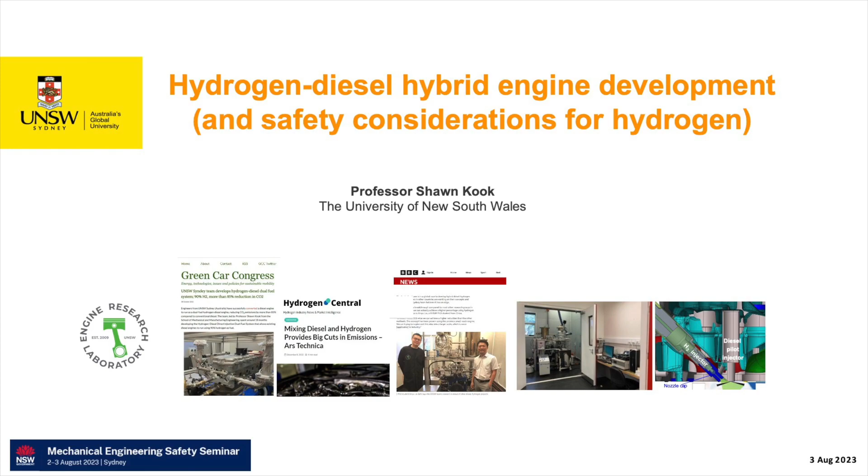So I've been showing up in many news articles, including the ABC News live show, who called me up like 2 hours before the live show, early in the morning. BBC News had a big hit too, and we started to get interest from pretty much everyone, investors, engine operators, engine developers, as well as the general public.

So I'd like to share the news, and to make my talk even more relevant, I'm even going to talk about some safety concerns around utilizing hydrogen in your workplace.

So hydrogen is something big now. It's a buzzword. It was big in the early 2000s, if you remember, but then it was quiet for a while. But now it's kicking up again as a valuable commodity, particularly for Australia.

Australia has a great vision to utilize abundant solar and wind resources to convert some of the water we can provide, seawater, into hydrogen, and actually export it to countries where energy demand is much higher than in Australia, countries like China, Korea, and Japan. So we have a clear vision and plan for it.

And the investment being made into hydrogen production is just massive. Just looking at the numbers, $260 billion US dollars is projected by 2030, and the investment is increasing. As I keep checking the investment portfolio, the number just keeps going higher and higher, led by the US as well as Germany, but the Australian government is hopping on too.

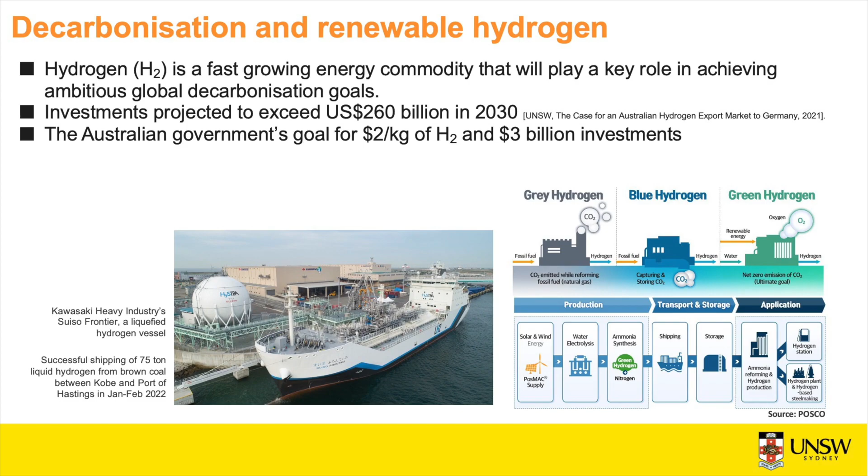If you're not really familiar with hydrogen as a new commodity, you'll be surprised to hear about the colors of hydrogen. Hydrogen has no color, but people try to flag a color to it. So our typical hydrogen is what's called gray hydrogen, which you get as a byproduct of fossil fuel processing. Then if you have some carbon capture facility in your hydrogen production facility, we start to call that blue hydrogen, rooting towards green hydrogen.

When you say green, that means the electricity is generated from a non-fossil based power source, energy source, and you use that to do water electrolysis to get hydrogen out of water. So that's green hydrogen. And there are a lot of feedstocks that I'll mention later on.

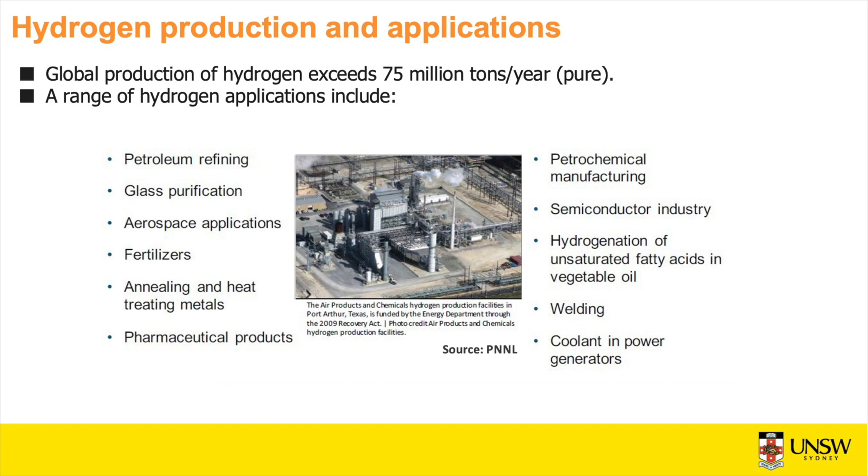But the use of hydrogen is nothing new. We don't have it in our households, but it's definitely been used in many processes: petroleum refining, glass purification, aerospace applications, and in agriculture for making fertilizer. All these processes require hydrogen as a needed element. So it has been around for a long time, and there's a very well-established safety standard around it too.

But then, where do we get hydrogen is becoming a big question. Traditionally, like I mentioned earlier, it's been obtained as a byproduct of fossil fuel processing. Then there has been gradual interest in producing hydrogen from other sources. One example is a coal mine, coal power generation plant, that would be willing to convert some of their coal into hydrogen as a new commodity.

Nuclear power, where electricity generation is continuous, that electricity can be used to generate hydrogen. Natural gas can be reformed too, because if you remember, natural gas is CH4, so there are a lot of hydrogen molecules in it, and we can extract hydrogen out of that CH4.

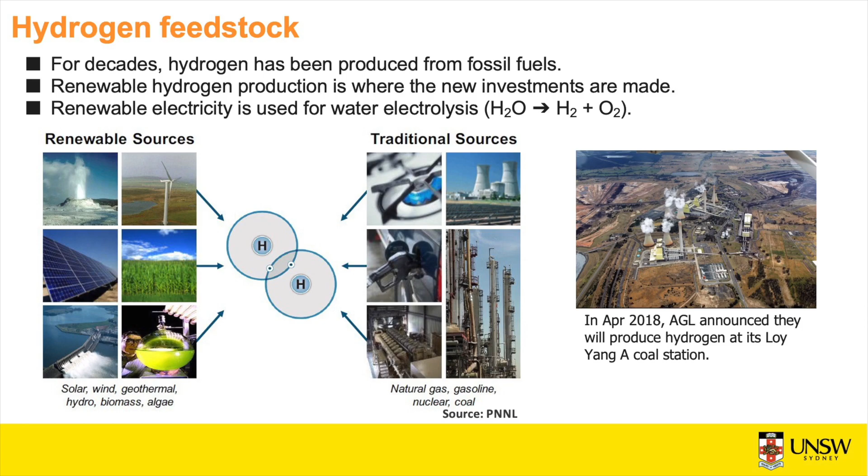On top of that, we have some renewable sources. As I mentioned earlier, water electrolysis is one process to get hydrogen. That energy can be supplied from renewable electricity, or from bio feedstock, where there is low carbon, a renewable, carbon neutral feedstock provided to generate electricity, which is then used to generate hydrogen. We call that renewable hydrogen. So there's a mix of feedstocks supplying hydrogen from greener sources as well as traditional sources, increasing hydrogen production overall, globally.

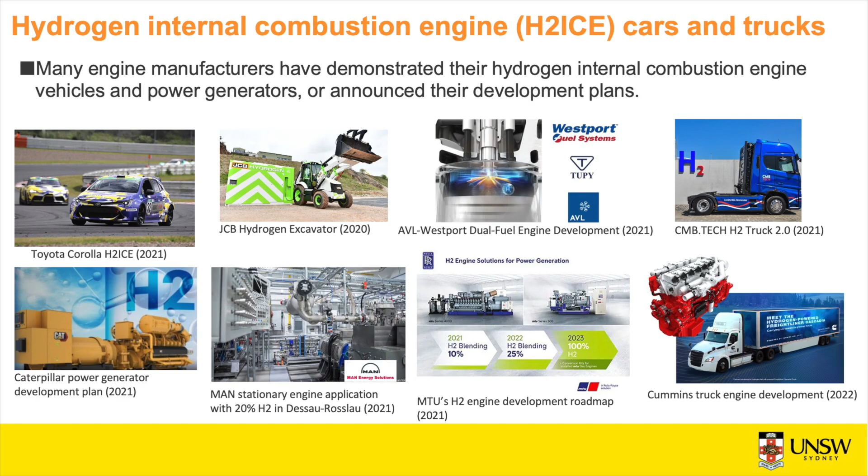Some exciting thing. I'm a mechanical engineer. I started my mechanical engineering study and continued my career because of this. There are some exciting things about looking at cars running, generating power that's based on combustion.

We burn petroleum or diesel in traditional cars, but now engine manufacturers are developing new kinds of engines and vehicles utilizing those new kinds of engines, primarily for hydrogen as a carbon neutral fuel. So when hydrogen is supplied as a green energy source, there's a good use of hydrogen in combustion engines. That's the theme here.

Toyota is actually leading. This is the largest automotive company in the world at the moment, surpassed Volkswagen a couple of years ago and is actually widening the gap thanks to their great success in hybrid sales and the profit made from hybrid sales. They are willing to put a hydrogen car into the market.

So the first thing they did was convert their existing Toyota Corolla into a pure hydrogen engine, put it onto one of the Japanese racetracks and demonstrated a full race with this new hydrogen car with great performance.

And there is a lot of development going on from other areas too, such as excavators, heavy-duty truck manufacturers like Westport working together with AVL and Tupy, and also some retrofitting and conversion tech implemented by a European company called CMB Tech. Then heavy-duty engine manufacturers are joining the party too.

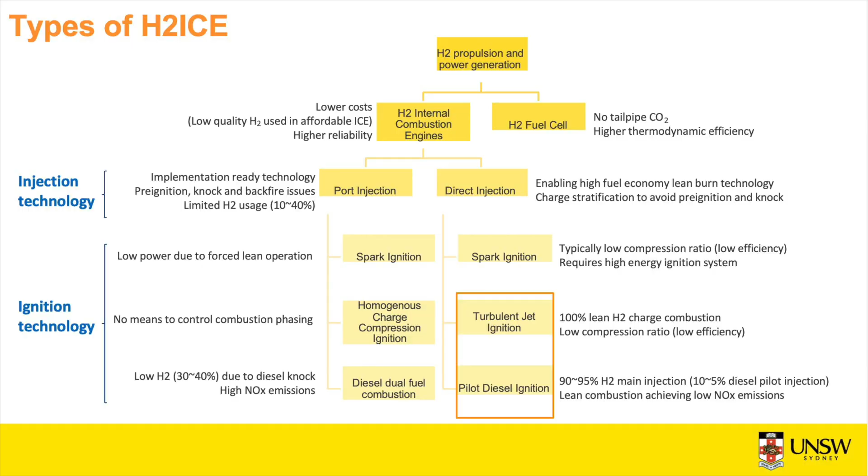Then the limitation there is that a spark ignition engine has a lower compression ratio. So when the piston cylinder is compressing, the volume change ratio is lower. That translates into lower thermal efficiency, so your engine is naturally lower efficiency. That's why you are using a diesel engine in your workplace, higher torque and higher efficiency operation. So fundamentally, the efficiency is limited.

Then the question is raised: is there any better way of using hydrogen in your existing engine, or a new kind of engine that can give you better efficiency? So there are a lot of questions raised about it and development going on.

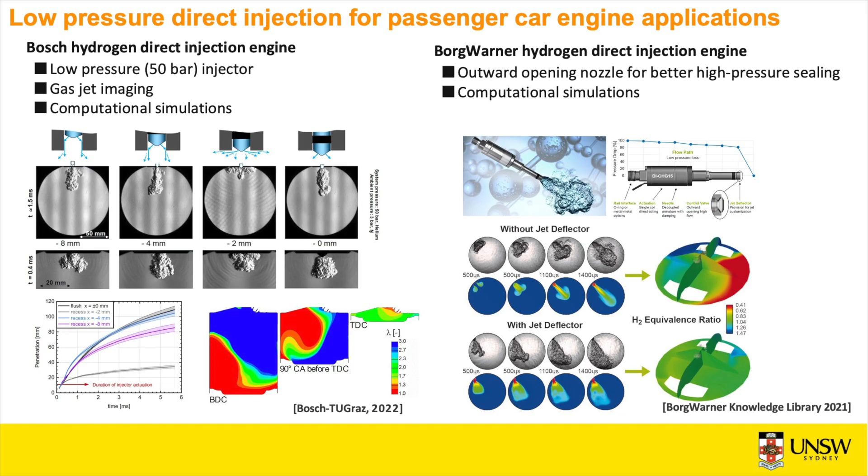And on the passenger car side, part manufacturers like Bosch or BorgWarner are working on low pressure direct injection systems, meaning that hydrogen gas is injected into the cylinder at a pressure that's higher than typical port injection engine pressure, but much lower than diesel operation.

Typical diesel engines that you're using are now hitting 3,000 bar of injection pressure. By the time the fuel is going into the cylinder, it's hitting about 3,000 bar, so 3,000 times atmospheric pressure.

The first generation hydrogen injectors made by Bosch or BorgWarner are going at about 50 bar maximum, so 50 bar over pressure. That can give you nice distribution of hydrogen gas jet. And there are some optical diagnostic techniques that can visualize this invisible hydrogen, particularly the Schlieren imaging technique utilized by Bosch. That's showing how hydrogen distribution could be different depending on the mounting position of a fuel injector. It was shown in this example.

BorgWarner is going deeper into that development. They now have an injector that doesn't have any holes, but has a pintle. So it has a slit of opening area where the hydrogen sealing can be much better than the typical hole type injector. And they're supplying the information about that through their computational simulation as well as gas jet visualization.

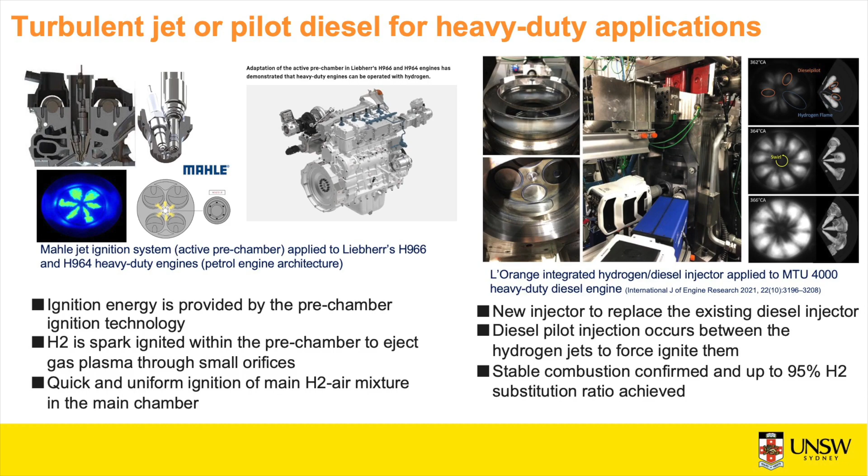On heavier duty applications, it doesn't actually go into the scale of earth moving equipment that you guys are using at the moment, but still it's heavy duty applications for trucks and some marine applications as well, small marine engines. The most advanced technologies for hydrogen utilization in that space is that you either do hydrogen pre-chamber ignition, meaning that hydrogen is supplied as a main fuel, but then you have a little chamber that includes a spark plug in it.

So you make a baby flame first using hydrogen through that spark ignition, and that reacting jet, the flame, is coming out directly into the cylinder and causing that two-stage ignition, pre-chamber type ignition system. It has great controllability, so robust ignition is possible using that setting. And Liebherr, that Swiss company, is commercializing that technology at the moment.

In Germany, L'Orange, it sounds French, but it's actually a Stuttgart-based German company. L'Orange has developed the injection system that can do both diesel and hydrogen injection in a single injector, an integrated system. And they've demonstrated great flame development and combustion of this hydrogen due to the sip of diesel fuel going in. It's like a diesel pilot fuel is generating a little flame, and it's causing the reaction of the main fuel, the hydrogen jet. So it's a hydrogen jet ignition and reaction that is shown as an example.

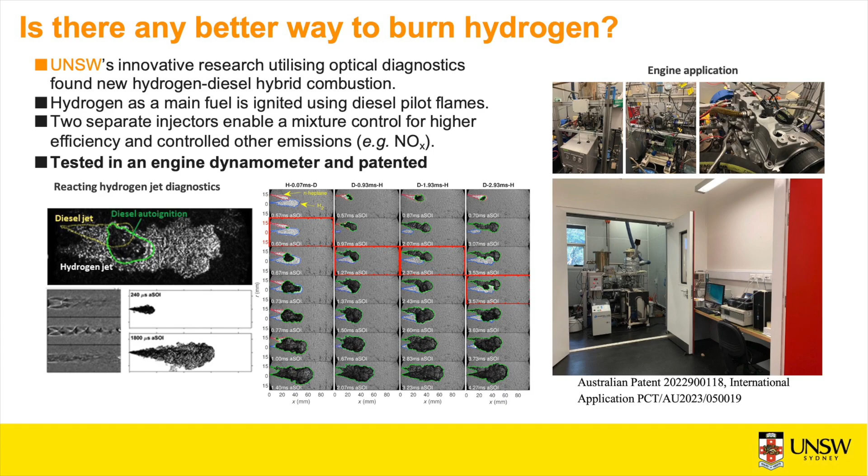Okay, so you've heard about Germans working on it, Japanese working on it, American companies working on it, but how about Australia? So we've looked into many options to burn hydrogen better, and what's the missing element there, and we found this. What if we have two separate injectors? So you have the existing diesel injector untouched in your engine. Typically, it's centrally mounted right into the cylinder, injecting multiple jets, creating a symmetric form of a diesel jet. On top of that, we can add a hydrogen injector so that we can have full control of that hydrogen jet.

And that's been studied in the lab facility. We are specialists in visualizing things and taking high-speed images and laser-based images as well. So we've looked into how the hydrogen jet, even before it burns, is generated, and saw some interesting things like barrel shock generation from the hydrogen jet injected at high pressure, like 200 bar.

And then we also looked into how the burning process itself is happening, and realized that the yellow area shown on the left side, the diesel jet, is actually causing the initial reaction, and the green area where the hydrogen reaction starts is catching fire around that jet in a nicely controlled manner. And that high-speed imaging gives you an idea about how the yellow-colored diesel jet is trailing the hydrogen jet green area and causing the reaction zone in a well-controlled manner. So we enjoyed great controllability of the hydrogen reaction through the control of diesel injection.

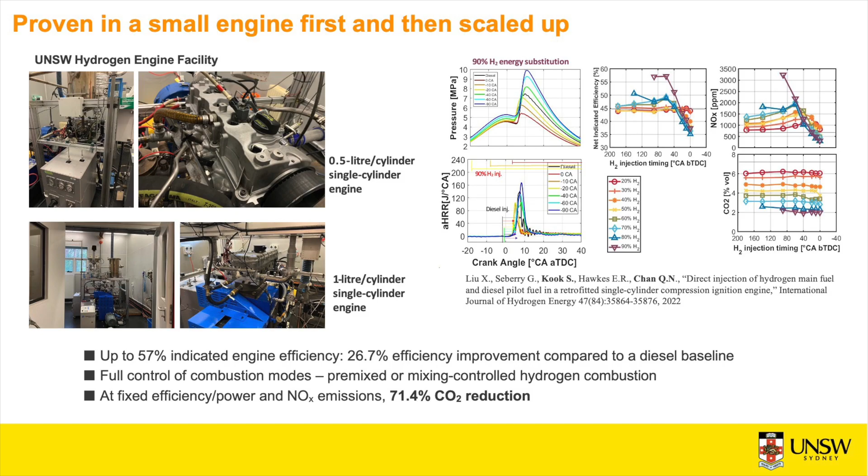And the performance charts shown here are actually confirming the excellent performance of this hydrogen diesel hybrid engine. With the hydrogen jet ignited by diesel flame approach, we see the efficiency hitting an indicated efficiency of 57% maximum. It's actually better even than the fuel cell system, which hits about 53% indicated efficiency. Diesel operation is at about 50% efficiency, so we're actually winning even against the baseline diesel operation.

Then we also looked at how much CO2 reduction we can achieve out of this operation. By supplying about 90% of the energy from hydrogen, we could achieve over 80% CO2 reduction immediately. That was a big factor for us: here is an existing diesel engine operating just like a diesel engine with only additional hydrogen, and we can achieve over 80% CO2 reduction immediately by just making a small conversion to that engine.

If you're really familiar with engine technology, the first question you will raise would be: how about NOx? The air comprises nitrogen and oxygen. And unfortunately, wherever there's a high temperature above 1800 Kelvin, the nitrogen and oxygen break down and then meet together, form NO, nitrogen oxide, then settle down as NO2. When you see much NO2 in the atmosphere, it's forming smog, it's becoming a source of fine particles, and it's also a greenhouse gas emission. So it's strictly regulated. Anywhere there's combustion, even with a non-carbon-based hydrogen fuel, it's unavoidable. So the question is raised: great combustion engine, how about NOx?

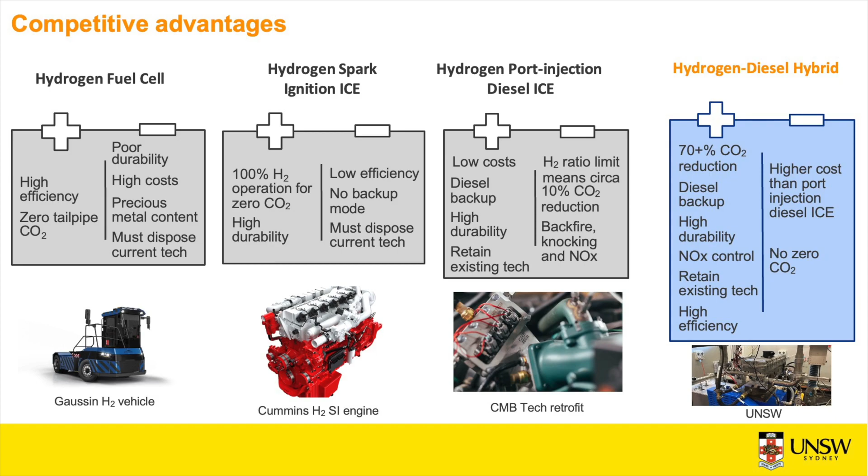Then how about compared to other technologies? It sounds exciting, the university did a great job, but there are many commercialized technologies around utilizing hydrogen. The first one you will hear of would be fuel cell vehicles. There are many energy projects going on to implement fuel cell vehicles on the road or in a controlled environment. Absolutely fantastic, zero CO2 emissions. Hydrogen utilization is amazing, but the demand for hydrogen purity is too high, which means the hydrogen production cost is too high, and the fuel cell production cost is too high. So it will take some decades until fuel cell systems can become practical and affordable at the same time.

The hydrogen spark ignition engine, as I briefly mentioned earlier for the Cummins engine, fundamentally runs at lower efficiency than the diesel architecture. How about then putting just hydrogen into the intake port? The simple implementation, you don't even need to touch the engine, just an intake manifold or port conversion with hydrogen in a diesel engine. That is limited to about 30% hydrogen utilization by energy, simply because you're putting hydrogen in too early. It's making too well-mixed a mixture, staying too long in the intake manifold and inside the cylinder, and losing all the efficiency.

Even if you seal it nicely, a higher hydrogen fraction in that nicely mixed condition, unfortunately, causes troublesome knocking. And this hydrogen knocking condition is an engine-damaging condition. One big knock is not just small knocking and pre-ignition leaving some marks on the cylinder head or piston top, but actually engine-damaging knocking that you can't really handle.

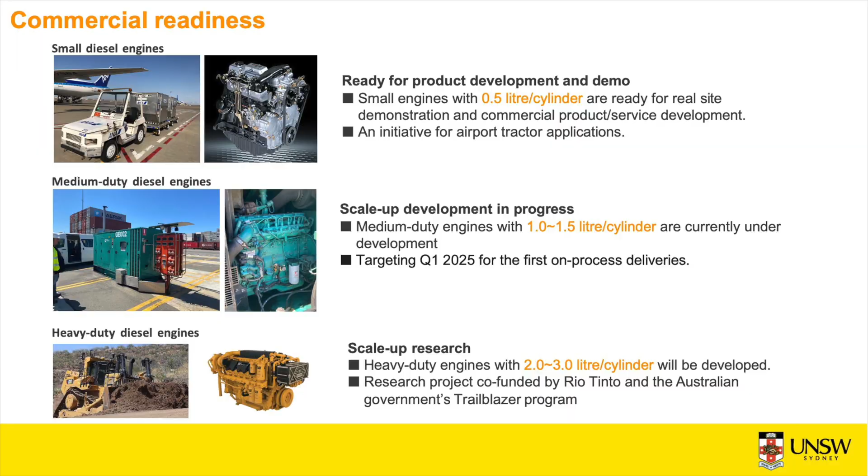That's the end of the talk actually for most academics, but we are living in a world where academia cannot just stay as academia, but has to reach out, do better socialization with the community, and make a real impact on the economy as well as society. So we are really encouraged to bring this into the real world.

Instead of waiting for the original engine manufacturers to commercialize this in 5 or 10 years' time, small startup companies based on innovative university culture can actually make a big difference. So we've moved ahead with that and came up with nice deals. There is a great initiative of implementing this new hydrogen diesel hybrid technology in the airport baggage tractor, very close to us here.

Another pilot and demo project that we're working on is based at the Sydney Port, where a diesel power genset, a power generator, can be converted into our hydrogen diesel operation to demonstrate its full capability of running in a real site, in a real environment, with the people who actually manage these diesel power generators. If they can be provided training, if this can be accommodated in a real site with no drama. That's what we are currently demonstrating.

And finally, thanks to Rio Tinto, who raised their hand to join the University Trailblazer program through the Department of Education, we've secured a significant amount of budget for the further development of this technology. We call this a major scale-up project, so that it can be relevant to Australian mining. We're looking at a large-scale Caterpillar dozer as a first application.

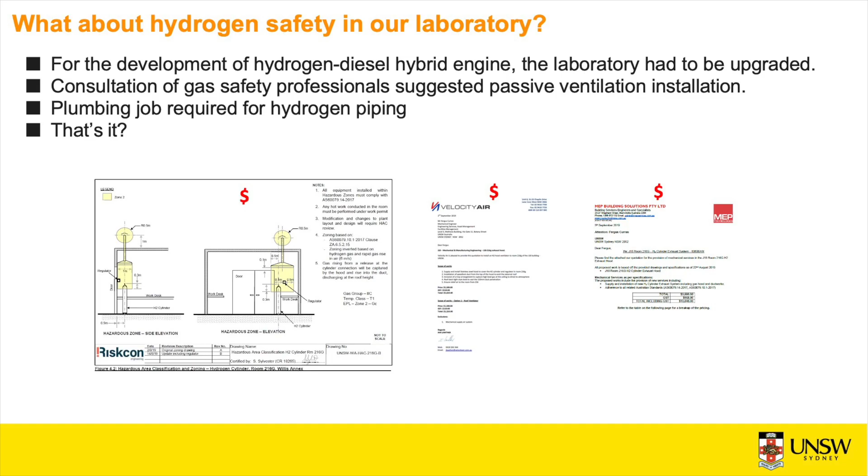But then, safety, from my own experience. When you're in university, it's very challenging to be super innovative when you're thinking about safety concerns. And of course, when you say, hey guys, I'm going to bring hydrogen into my lab, a lot of people say no immediately. So I checked what's actually needed to work with hydrogen in my laboratory, and it turned out that there is actually a standardized process.

There are many experts and specialists, as much as I can afford. Not much hassle. It's not that you have to create your own standards or talk to all these committee members to have a new set of standards. Instead, you can just follow the standards already provided through consultation with the experts in safety and inspection. So we talked to them and realized what's needed is just a small amount of funding for added ventilation within the lab.

Not even forced ventilation, but passive ventilation needed. Did all the calculation. Lucky that I have a spacious lab, so wasn't really concerned about the volume of air versus hydrogen that we're using. With that all in mind, the safety implementation has been quite straightforward.

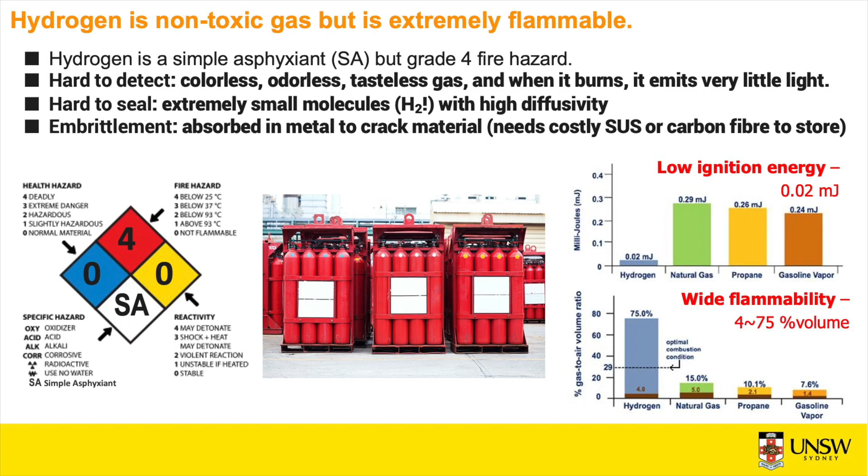It is because it's a non-toxic gas, thanks to that. Just an example, if we were going to bring in ammonia to the lab, it would be a completely different story. We would worry much more about the toxicity of the gas we're using than its being a fire hazard. But for me, that's really important.

The problem here is that hydrogen is extremely hard to detect. It's too small. It's only H2, the smallest molecule on Earth. So you can't really deal with it without proper sealing, control, or regular checkups of any potential leak, and even predictive checking of the leak sources around. And it doesn't have any smell and no color. So the detection of hydrogen is becoming a real deal. And being small, as I mentioned earlier, it's too hard to seal in many ways.

And embrittlement is something that you might have heard of, that any typical carbon metal will crack easily by having hydrogen stored for too long. So stainless steel is the first material that you can use, or costly carbon fiber, to store a lot of energy in it. Most transportation applications that we're looking at, like the Cummins diesel engine that I mentioned earlier, are based on those costly carbon fiber-based storage tanks, 5 of them carrying 40 kilograms in total.

But in your workplace, most likely you will see this compressed gas, red colored, so visible. It's rated for fire hazard, so it has to be treated properly for that. The reason behind it is fundamentally hydrogen requires an extremely low amount of energy to ignite. And at the same time, there's a concept of flammability, how much hydrogen is needed to set a fire with respect to available air. So you have to make super extremely diluted hydrogen to be able to avoid any flame. So that's like an order of magnitude difference.

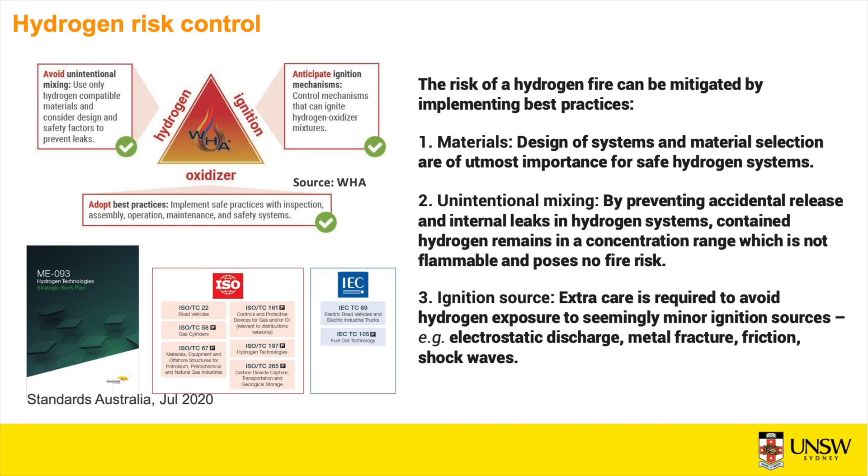Australia has hydrogen standards, ME 093, well established, reflecting all the ISO and IEC global standards. So we're not behind at all. We are actually going at the same pace as the global movement on hydrogen safety management. Just make sure that we use material that doesn't cause any hydrogen embrittlement. Sealing should be done carefully, more carefully than for other gas resources like natural gas. Ignition sources need care too: sparking room lights may be acceptable for nitrogen, methane or natural gas environments, but for hydrogen, that's not acceptable. So more best practice needs to be implemented.

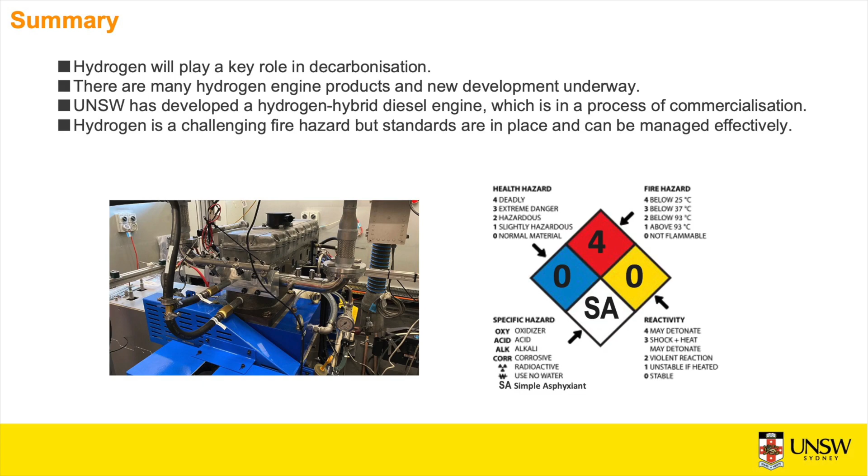Okay, just to sum up, hydrogen is a big thing. It will play a key role in our decarbonized future. No question about it. There will be a lot of hydrogen engines coming into our real life, from passenger cars, heavy-duty trucks, agricultural and construction equipment, and even earth-moving equipment. UNSW has developed this exciting new technology, so we'll be part of that big picture by implementing this hydrogen diesel hybrid engine in a real-world setting. You'll keep hearing news from us about the initial demo project and the growth of the startup company that I mentioned earlier, at a larger scale.

Then, hydrogen is a safety hazard. It has serious fire concerns, so care should be taken to control it better. But there are standards and procedures well in place, and they're being implemented very well. So nothing to worry about, it just should be taken care of better.